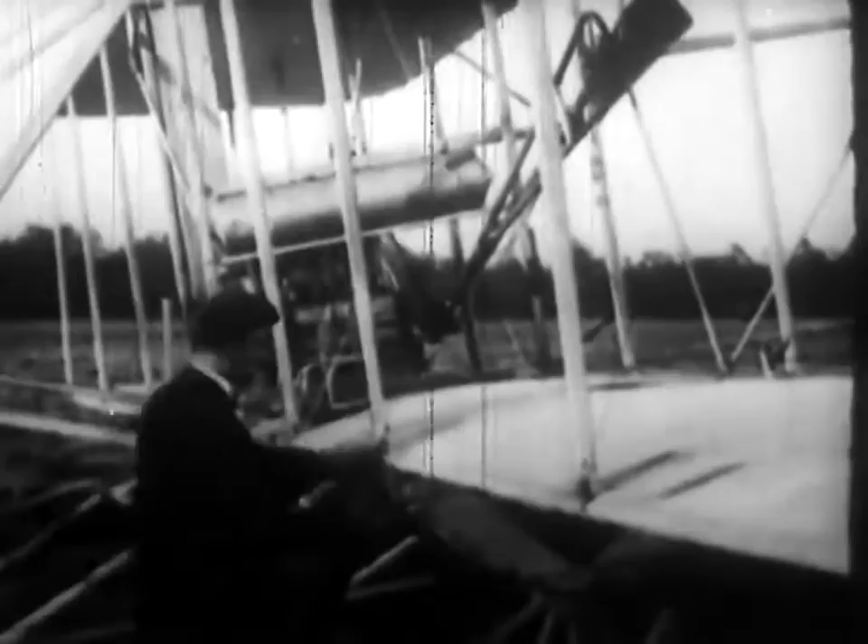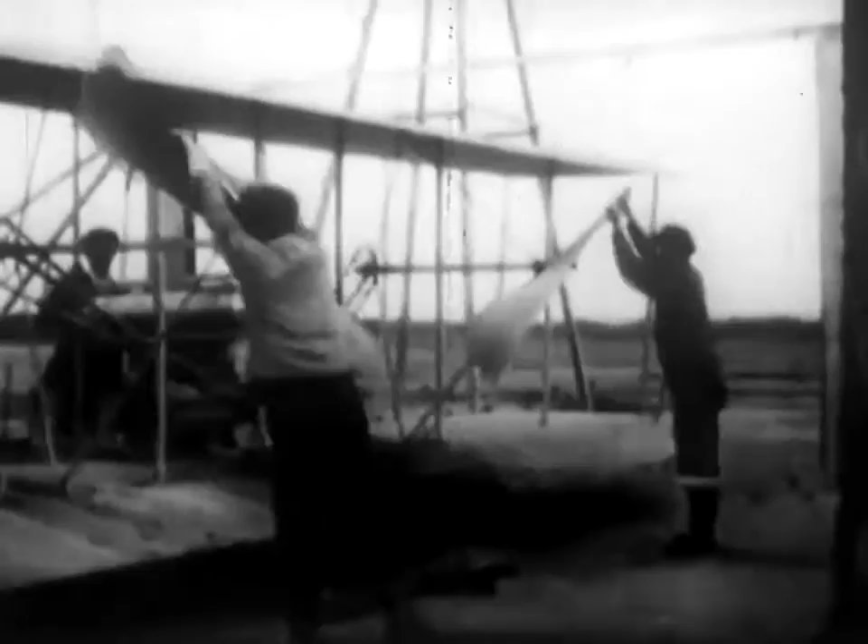In 1903, on the plains of Kitty Hawk, North Carolina, this history began. In the granddaddy of all modern planes, the Wright brothers won immortality by sustaining flight in a heavier-than-air flying machine. There is no fuss or ceremony, no cheering crowds. The motors sputter and catch, weights drop, the ship catapults off the ground into the air for the first flight on record.

Since then, aviation history is written in a never-fading book of records. In 1928, a Lockheed Vega, the well-known Yankee Doodle, reaches New York from Los Angeles in 18 hours and 58 minutes. At the controls are Colonel Arthur Goebel and Harry Tucker.

In 1929, Captain Frank Hawks climbs aboard his Lockheed to set a new transcontinental mark. Good luck, Captain. New York is only 3,000 miles away. Off on his way to a new record, one of the many he is to establish in the years that follow.

Into the cockpit of his Lockheed Sirius climbs Colonel Charles Lindbergh. Mrs. Lindbergh is with him. Flying together, as always, they are heading from Washington, D.C., across the Bering Sea to Japan. A perfect landing after almost half the world has rolled by beneath their wings. Cheers and waving flags as Tokyo greets them.

That same year, 1931, Ruth Nichols lands her Lockheed Vega after establishing a new feminine altitude record of 28,743 feet. Nice going, Miss Nichols.

1933, a famous Lockheed, the Winnie Mae, carrying a famous flyer, comes home from a solo flight around the world. What an achievement for Wiley Post. First man to fly around the world alone, and first to fly around the world twice, both times in a Lockheed.

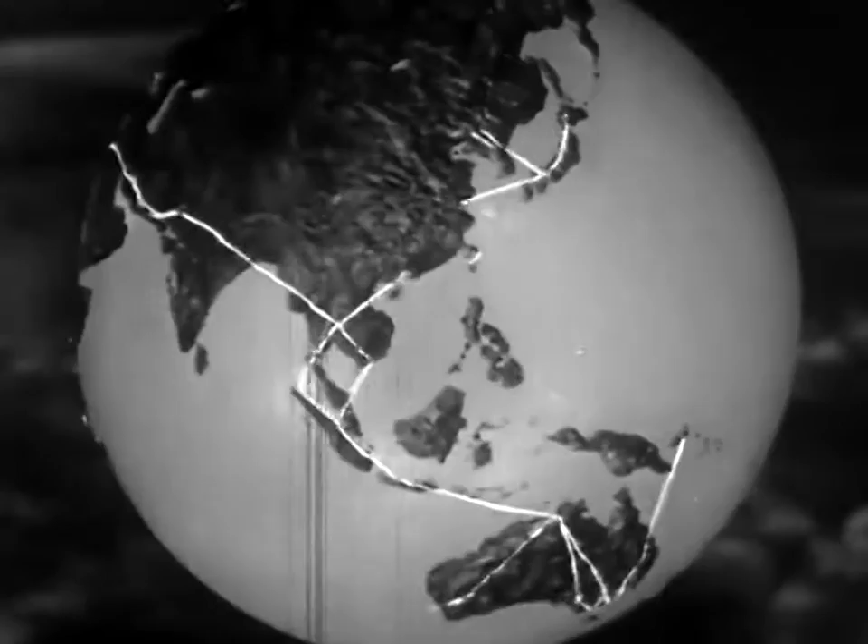Worldwide coverage, but it has not been accomplished in a day. It is the result of a smooth-running combination of men and machines. In that combination lies the story of Lockheed itself. It is a success story, modern, exciting, typically American.

The Lockheed Aircraft Corporation plant, Burbank, California, in 1926. And today, the same company, the same location, but quite definitely not the same plant. As recently as 1932, sales aggregated the overwhelming total of $23,298.03. In 1940, actual deliveries amounted to more than $42 million, and conservative estimates indicate that in 1941 this figure will be more than doubled.

And to the men of Lockheed belongs a large share of the credit, to their skill and to their loyalty. They are a cross-section of typical American workmen: drillers, riveters, toolmakers, die-casters, machinists, and technicians. In 1931, there were only 300 of them. In 1941, over 35,000. Every man who checks in, from office boy on up, has taken and passed exhaustive tests covering intelligence, temperament, and special aptitude to prove his individual ability. 35,000 American workmen, the right men for the right jobs to build the best planes.

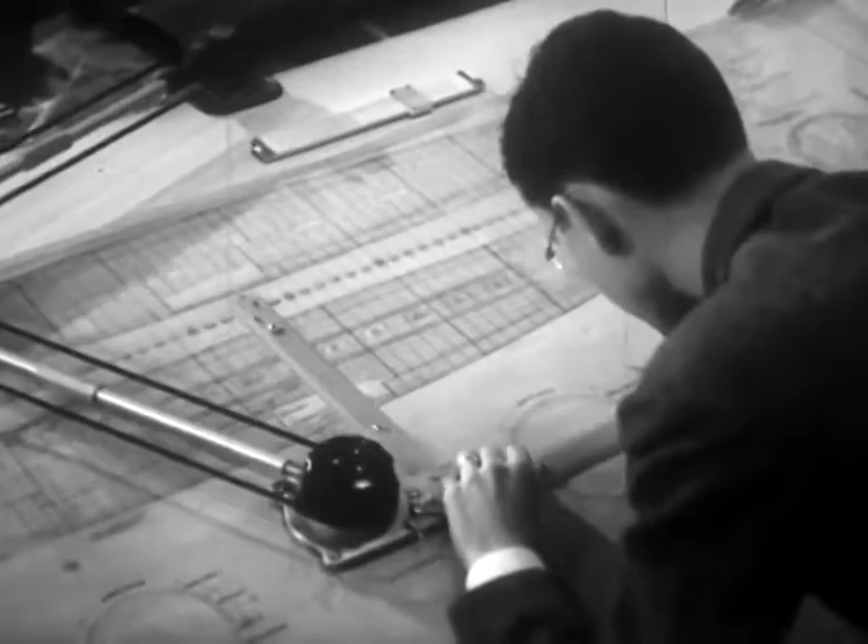This is not a trick shot made with mirrors. It is the drafting room of the engineering department, where every new Lockheed has its beginning, conceived with the purpose of supplying the answer to definite needs of the aviation industry. To attain this goal, over 850 engineers make over 5,000 drawing plans, devoting a total of over 200,000 work hours to their mission of creating one new design. The component parts of a modern airplane's wing, fuselage, and tail surface are almost countless in number, yet every single one of them must be engineered. Even the most minute part receives the greatest attention. Four separate drawings are made showing detail from four different angles. Although the part is no larger than a silver dollar, it will have to go a great deal further.

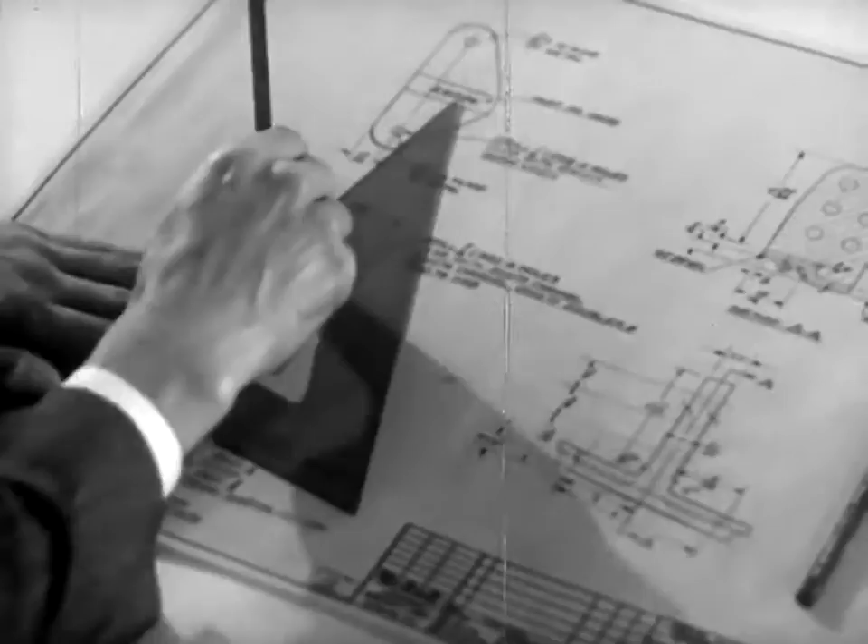The interior of a plane is one feature of design seldom associated in one's mind as coming under the supervision of the engineer. Yet one of his most important jobs is to provide utter comfort for passengers traveling through the air at high speeds. The Lodestar's cabin has been designed for this comfort. Inside, the sound of powerful motors is reduced to a pleasant hum by scientific soundproofing and vibration control. Restful chairs, ample space, and headroom are results of thoughtful planning, and all Lockheeds are especially adaptable to the requirements of private owners. For businessmen to whom time means money, the Lodestar is convertible into a convenient and dependable office in the sky. The compact 12 becomes a comfortable lounge for attending important events anywhere at any time.

The cabin of Lockheed's new four-motor transport, the Excalibur, will look very much like this. Although the plane is still under construction, the engineers have built an exact replica, known as a mock-up, out of wood. In this way, every possible detail of passenger comfort can be effectively predetermined and applied.

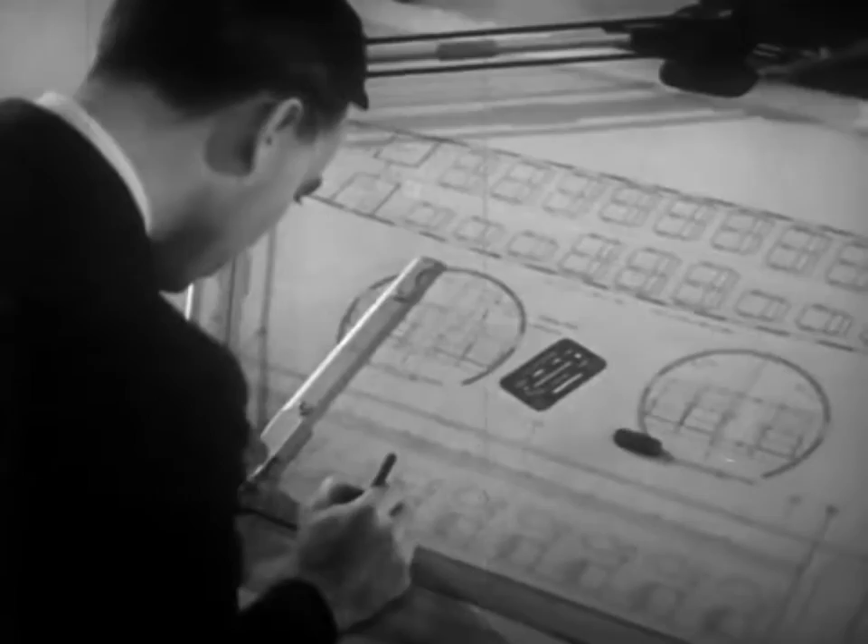But the ideas and plans that this man and the hundreds like him put into execution are not only those of Lockheed's chief engineers, but those of the entire flying world. For the Market Research Division maintains close contact with the operative branch of the industry. The staff compiles lists of important features relating to a plane's design. These findings are set up in the form of questionnaires.

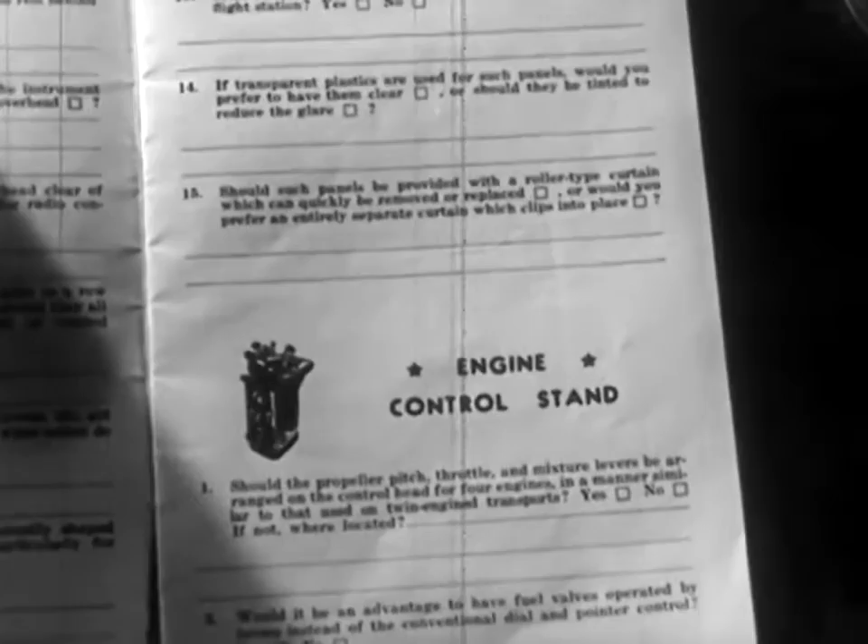If you were to build your own ship, on the flight station, where would you locate emergency controls? On the engine control stand, where would you put the levers? And the rudder pedals? These comprehensive questionnaires are sent to airline executives, pilots, transport officials in every corner of the world: to Trans-Canada Airlines, R.C. McLeod in South Africa, Tri-American Aviation, Buenos Aires. The list is almost endless, but to mention a few more: American Airlines, Lieutenant Thatch of the VP-5 Squadron Canal Zone, and British Airways.

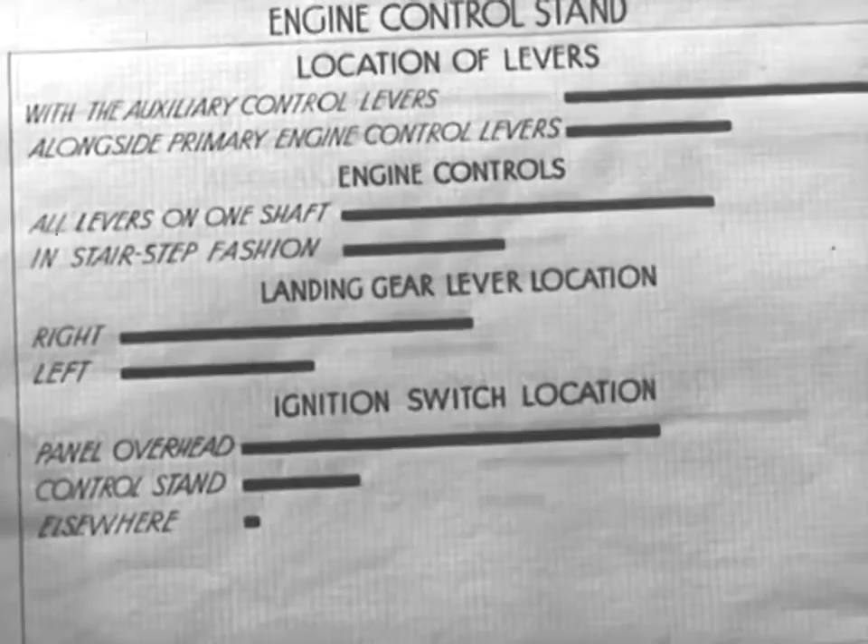The replies to these pamphlets are carefully sorted, for they represent knowledge gained under actual flight conditions. Detailed graphs and charts are compiled by competent statisticians. No suggestion is too small. Every answer to every question is checked and noted. These findings are recorded in another pamphlet: You told us this is the way you would do it, on flight station, on engine control stand, and on rudder pedals. We asked, are brake toe pedals desirable? 93% said yes, 7% no. That verdict is submitted by men whose combined opinions represent the experience of over 16 million hours of flying.

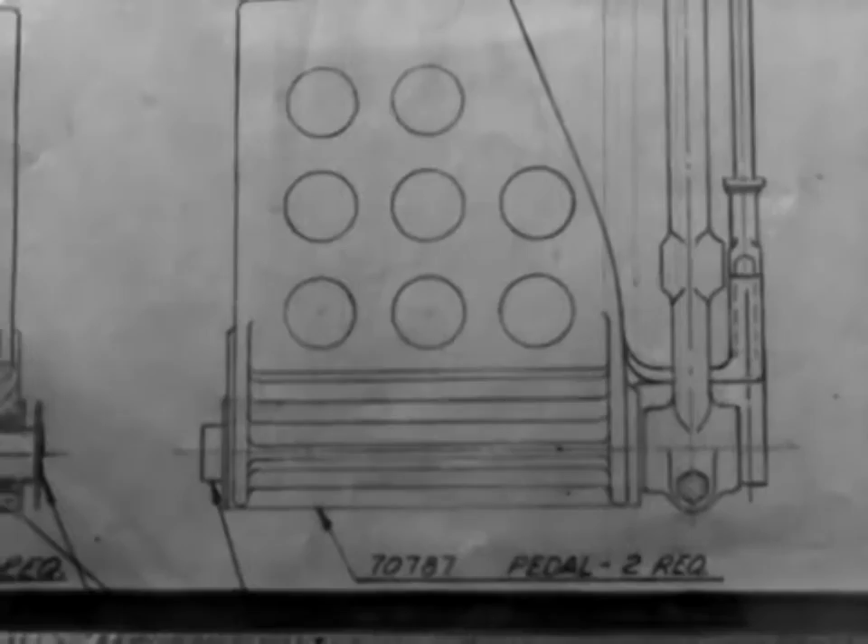These practical viewpoints, as gathered by market research, are submitted to the engineers. They combine these ideas, together with their own creative ability, in the conception and building of every new Lockheed plane. That's how Lockheed designs airplanes to suit the men who know airplanes best: operators, pilots, and regular airline passengers.

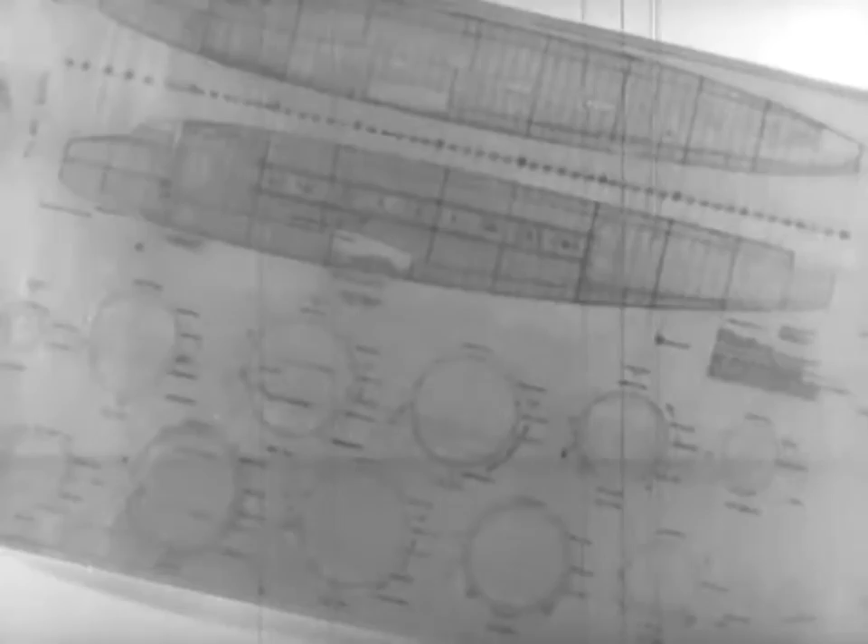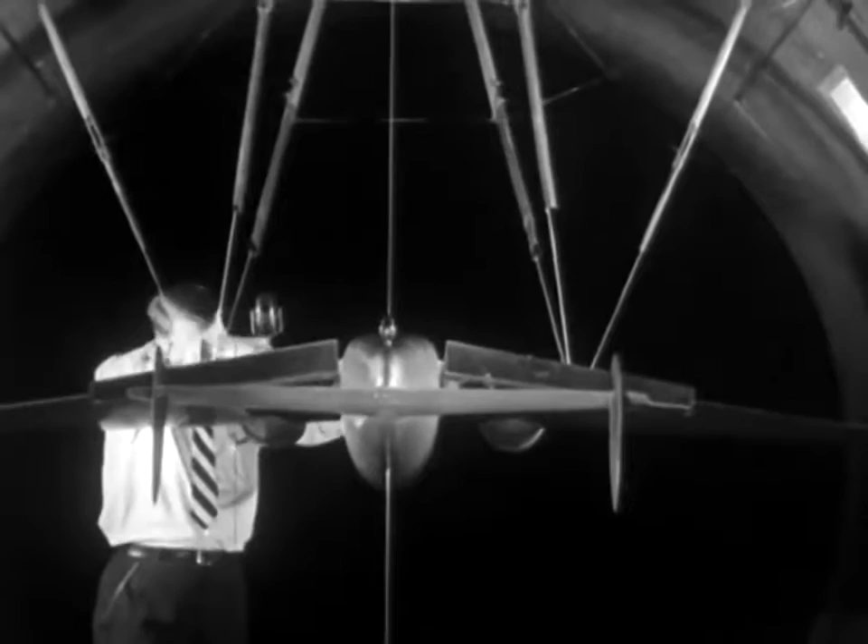And the first form a new plane takes is on paper. From these drawings and thousands like them, an exact scale model known as a wind tunnel model is made and is connected to instruments which determine its flight characteristics. The model is hand-carved, accurate to the fraction of an inch, weighs over 500 pounds, and costs more than $5,000 to build.

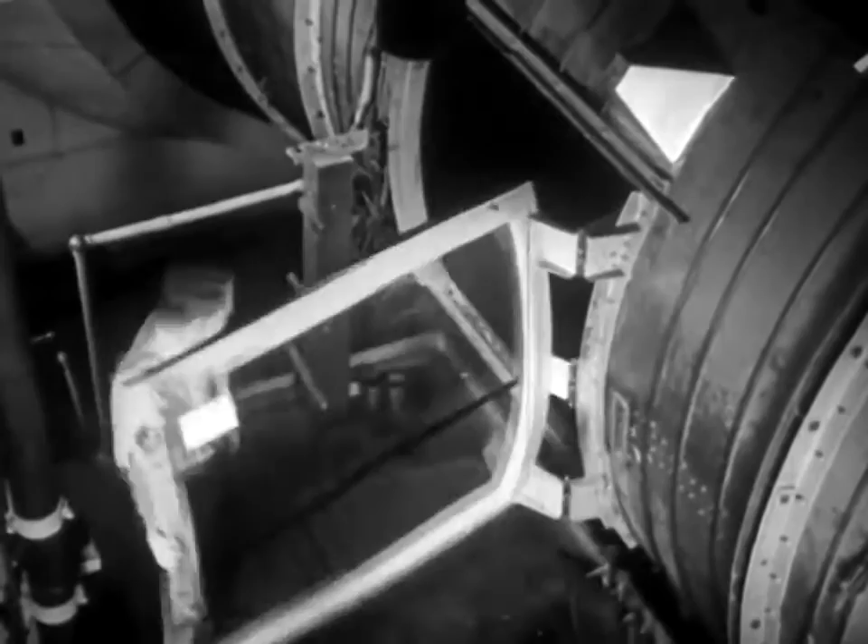The door is closed, the wind tunnel sealed. A flip of the switch, and the wind propeller whips up to speed. The model is exposed to a far higher velocity than this 90-mile-an-hour wind.

The small wind tunnel model is actually subjected to and withstands a much greater force. From an idea to an actuality, from theory to fact, from a model to a completed Lockheed, the plane has been built. More than that, into it has been built the strength, ruggedness, and durability necessary for its safety and high-speed performance.

But not so long ago, this shining plane was only a small part of a trainload of metal addressed to Lockheed, for the metal inside these wooden frames is the stuff that planes are made of. Hard and strong, it must be fabricated by men and machines into the parts that make airliners.

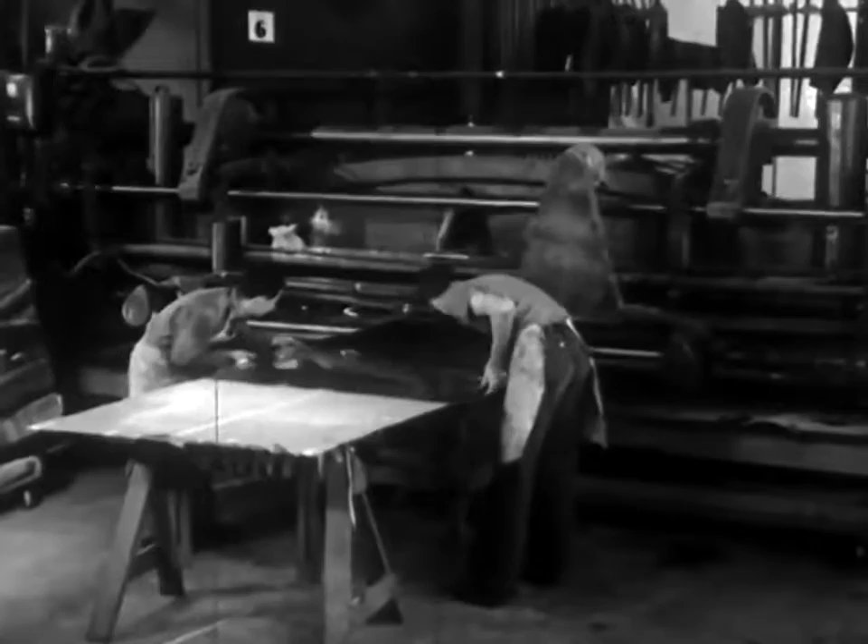Giant shears act as huge mechanical scissors. Metal sheets are slipped into place. The sharp blade strikes and cuts through them as if they were cloth.

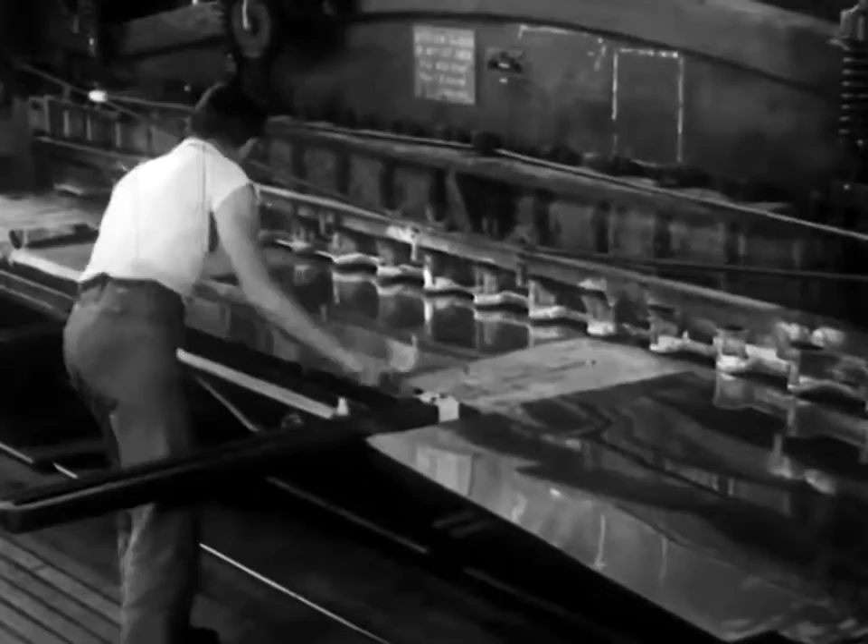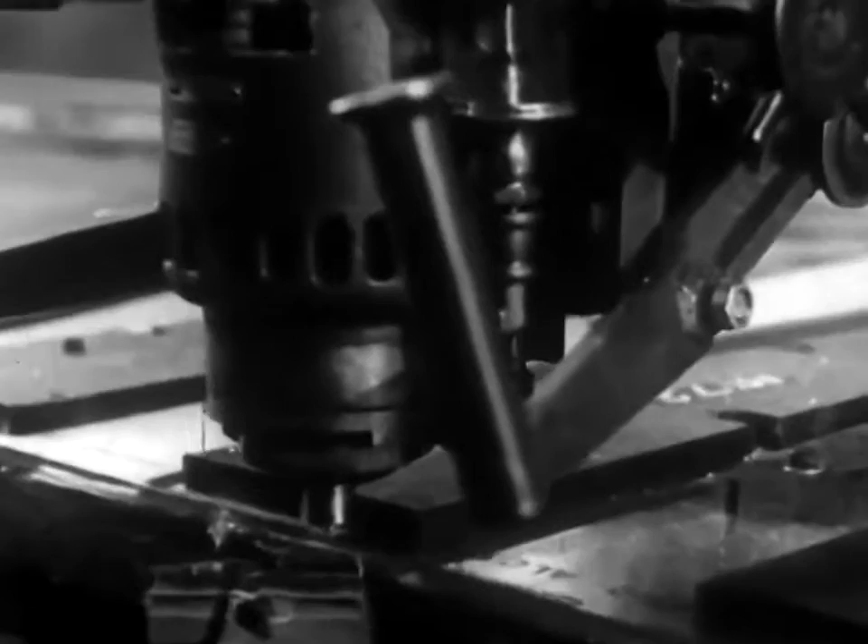The high-frequency router, a dental patient's nightmare, turns 15,000 revolutions a minute and cuts layers of metal into their first rough shape. The bit turns so fast that it must be cooled by a constant stream of oil.

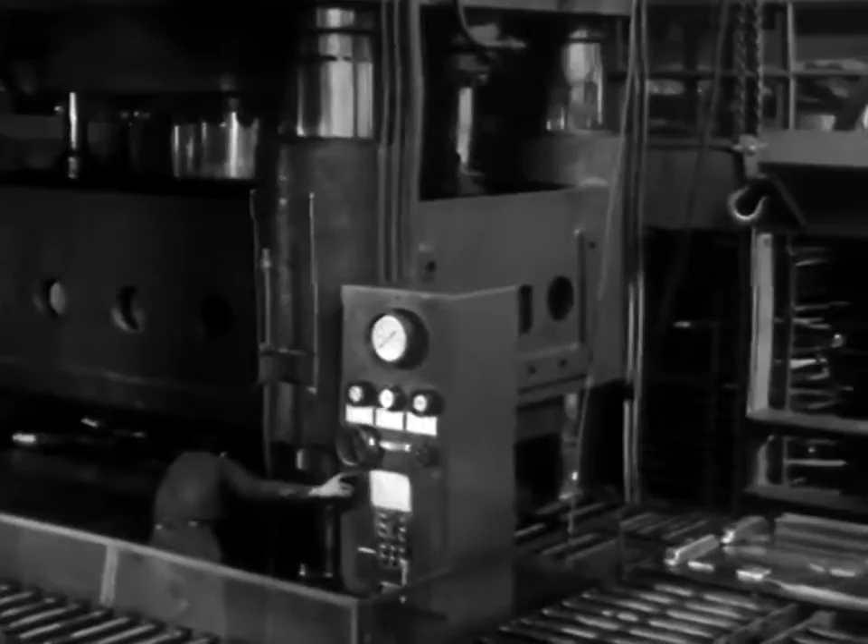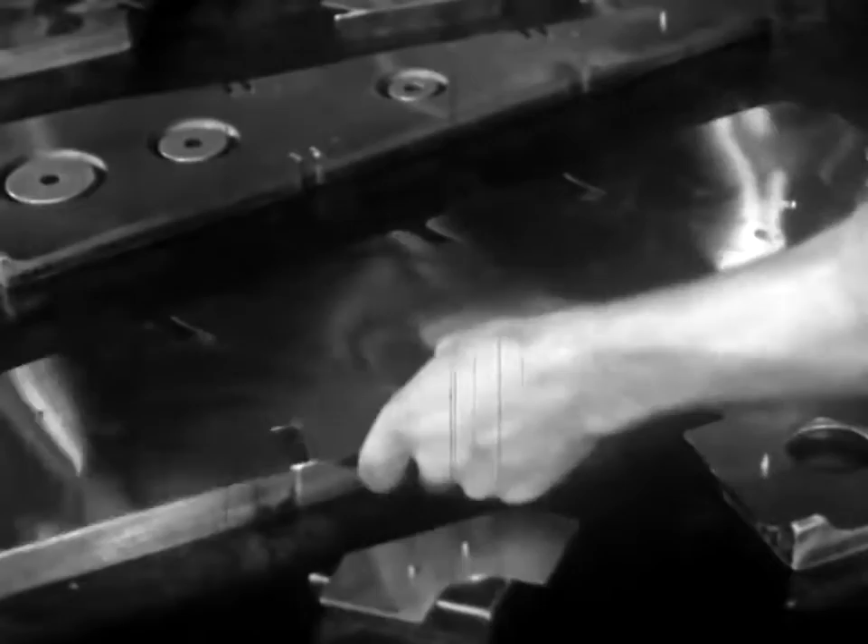The massive hydro press exerts an overall pressure of 9 million pounds, and it literally squeezes parts out of metal. An endless chain of roller conveyors carries a tray with the forms to workmen. They put the metal, which has already been cut to the correct size, in place on the forms. The tray now continues on its way into position under the press.

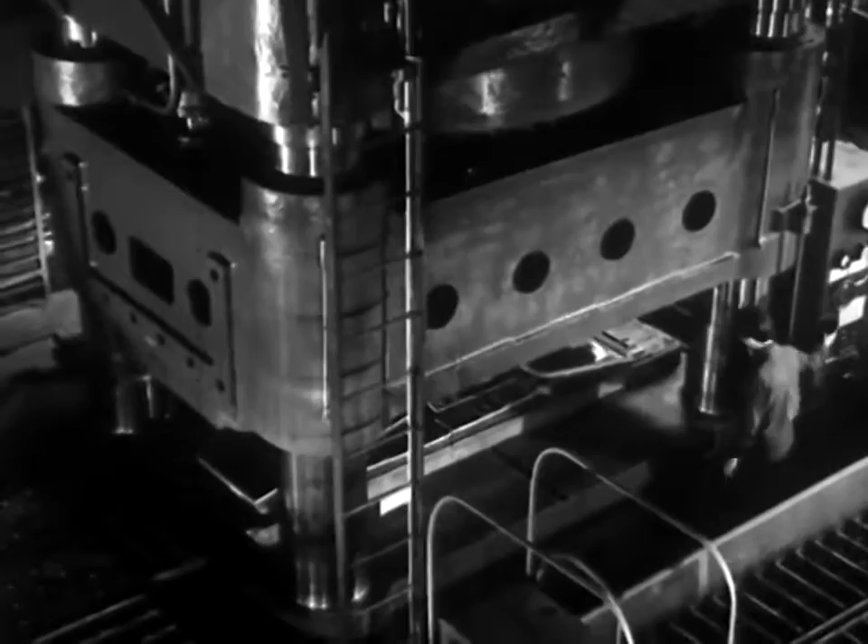The operator touches a switch, the press starts down, and look out below. Almost unbelievable pressure, an irresistible force, but under perfect control. And where plain sheet metal went in, finished parts come out. The hydro press turns out more parts in 1 minute than 2 men could complete in a whole day, and turns them out better and more accurately.

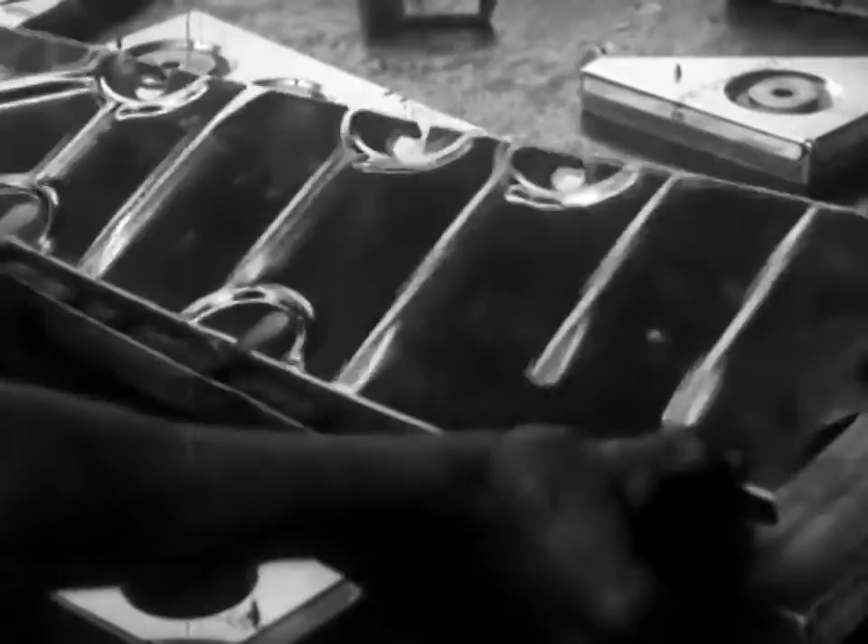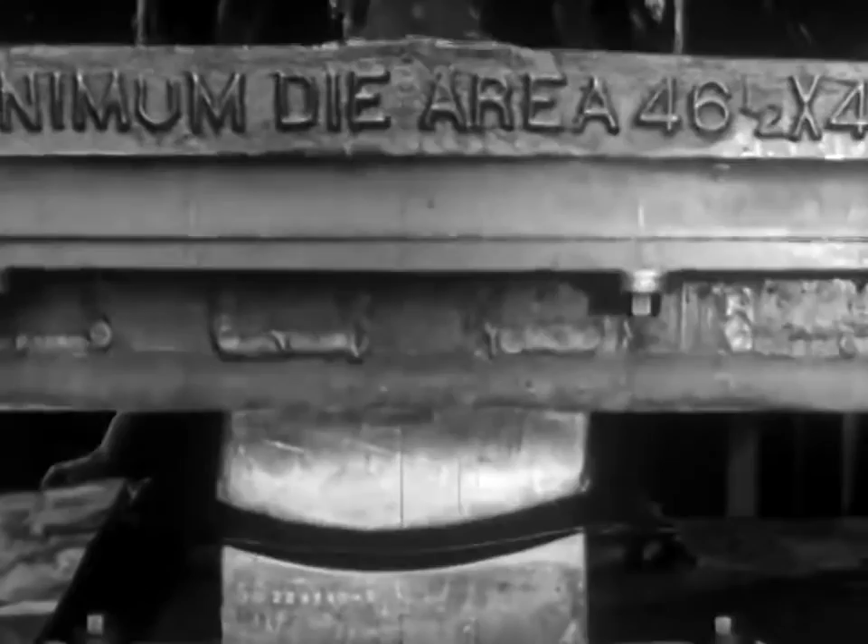A compressed air stamp which forges metal is an excellent example of powerful machinery under absolute control. Taps as gentle as a tack hammer, then the crushing impact. What a nutcracker this outfit would make. And yet its control is so delicate that it can crack an egg, at least so the operator claims. Look out there, a little too hard and you'll have an awful mess. Be careful.

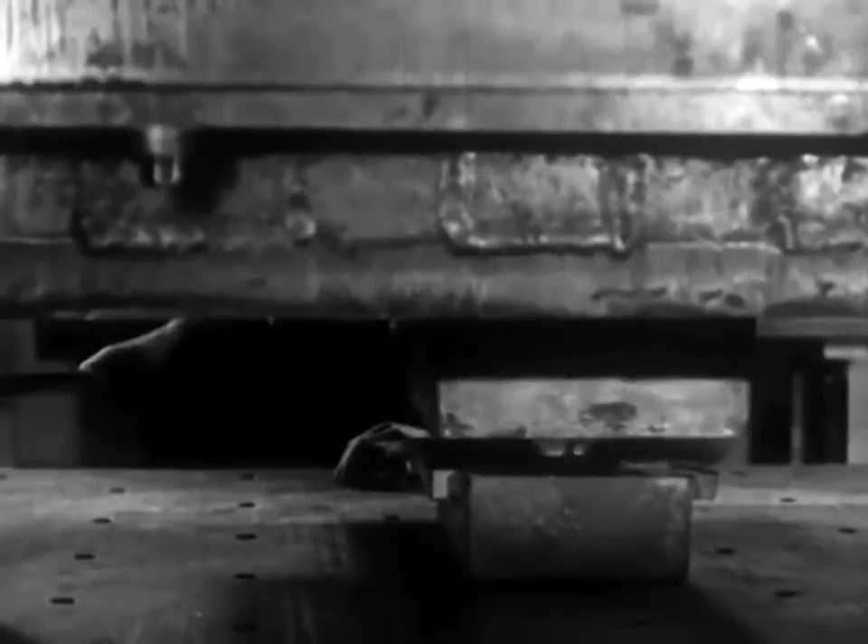Skilled men and precision machines have fabricated these parts. But even metal can be strengthened and protected. To do this, there are several types of processing. Complete electrochemical anodizing baths provide parts with a protective coating of oxide film. This is a safeguard against the threat of corrosion caused by moisture.

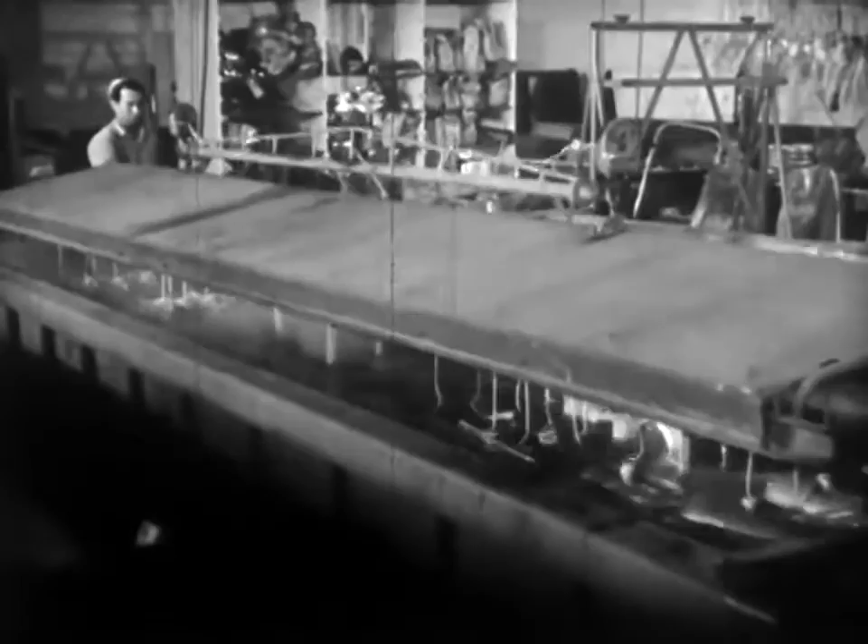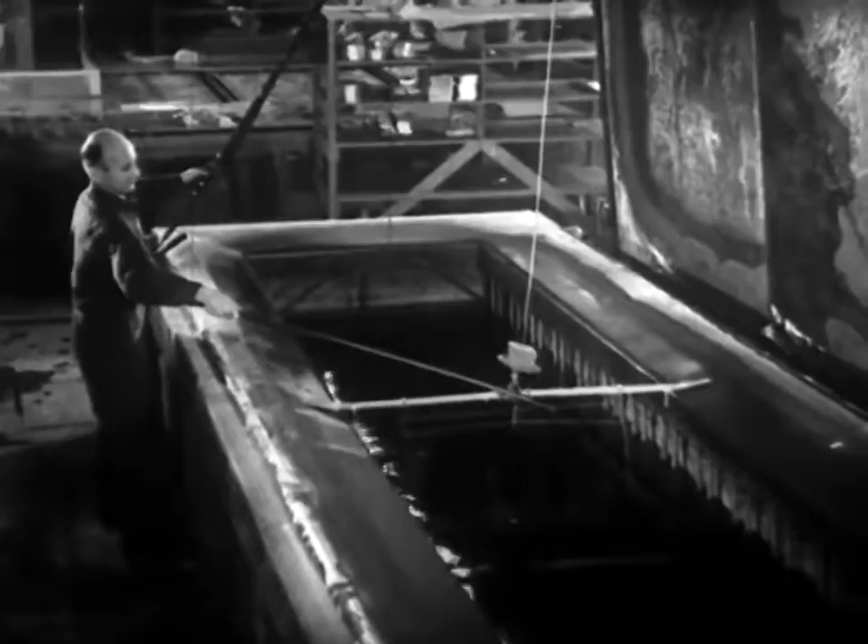It is an interesting fact that these parts are protected against any harmful effects of moisture by being given a bath. Another type of bath is used for a different purpose. In order to harden and thereby strengthen certain parts, they are immersed in a hot salt solution of sodium potassium nitrate. In large ovens, other parts are hardened by baking at 1550 degrees Fahrenheit and quenching them in oil.

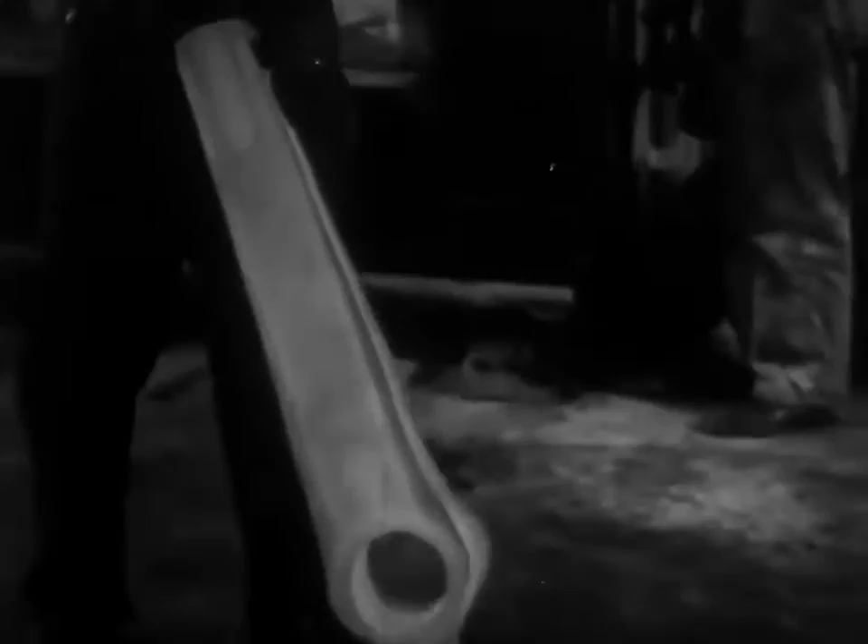It is easy enough to say that these parts, which will eventually be the plane, are strong. To prove that they are, to constantly guard the Lockheed measure of strength is the duty of the testing laboratory.

A spectrograph is one of the most modern scientific testing devices. It analyzes the purity of the metal alloys which go into a plane.

Tremendous heat created by an arc burns sample filings of the metal. These filings are placed in a cavity on the lower of 2 acid-treated graphite electrodes and then burned. The light of the burning metal passes through a lens and then through a rotating sector, the adjustable opening of which controls the amount of light falling on the slit.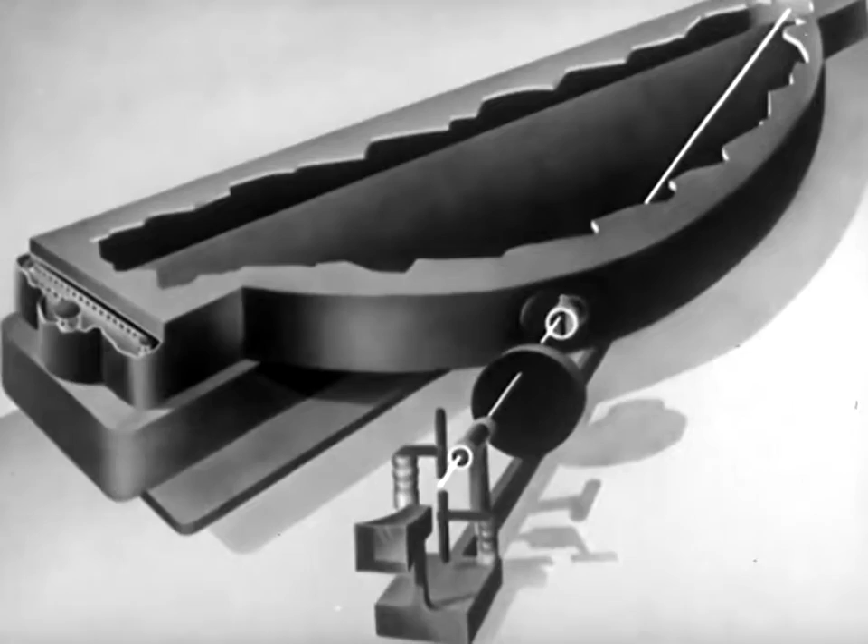The light now passes through the slit and falls upon a diffraction grating. This diffraction grating is a concave aluminized glass plate on which 24,000 lines per inch have been ruled with a diamond point. The light is separated by the grating into wavelengths.

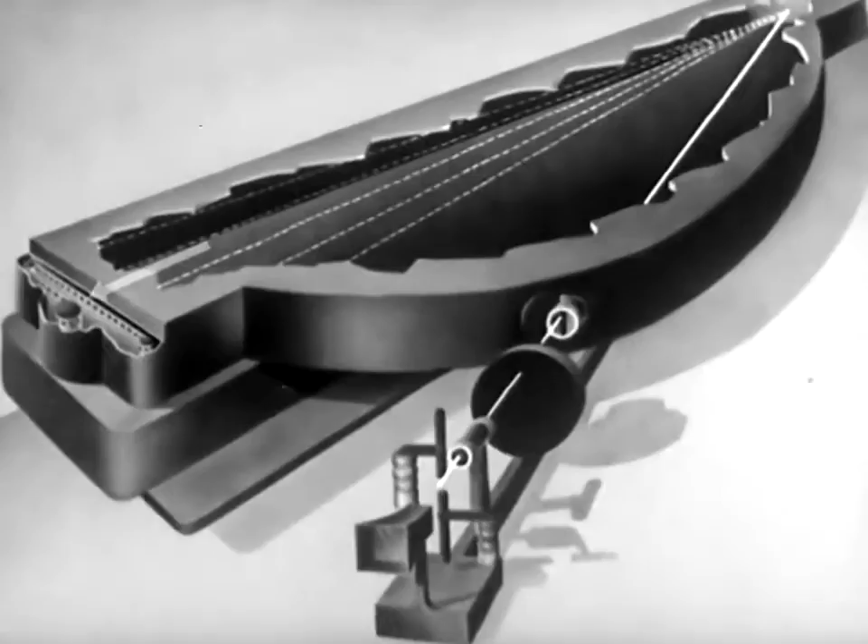These wavelengths, or light rays, fall upon a strip of film, and a photographic record of them is thus produced. Since each element has its own wavelength, from the developed film it is possible to determine exactly which elements are present in the alloy. In this manner, the spectrograph immediately detects all impurities, and any inferior metal is promptly discarded.

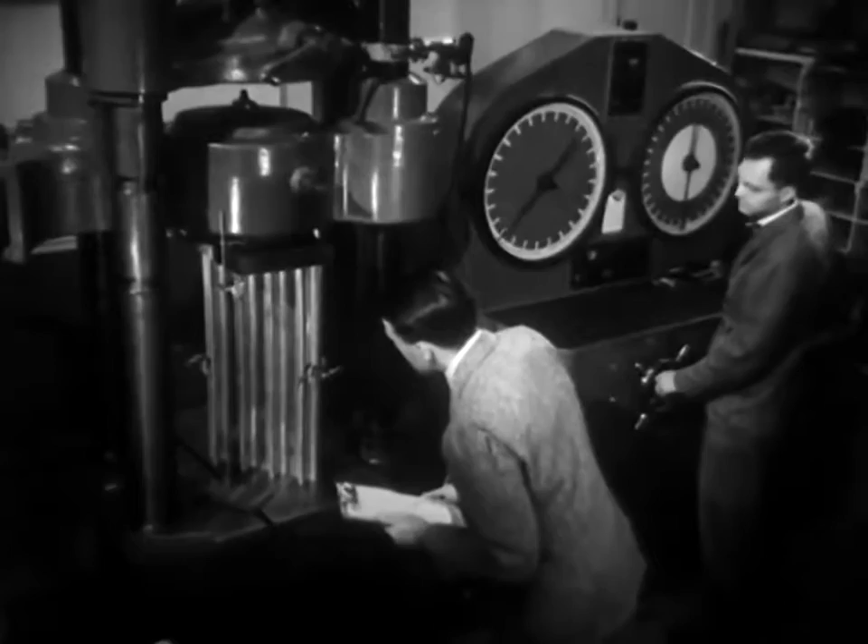The sole purpose of this huge machine is to break things. Its powerful jaws, capable of a compression of 300,000 pounds, are about to crush a small section of the wing in order to measure its resistance.

Now watch carefully. The upper jaw is clamping down with an invisible, relentless force on the seemingly frail strip of metal. But actually, just how frail is it? 60,000 pounds? 70,000? There it is, a slight ripple. The breaking point has been reached, and it takes a pressure of over 80,000 pounds to even bend this frail little section of a wing.

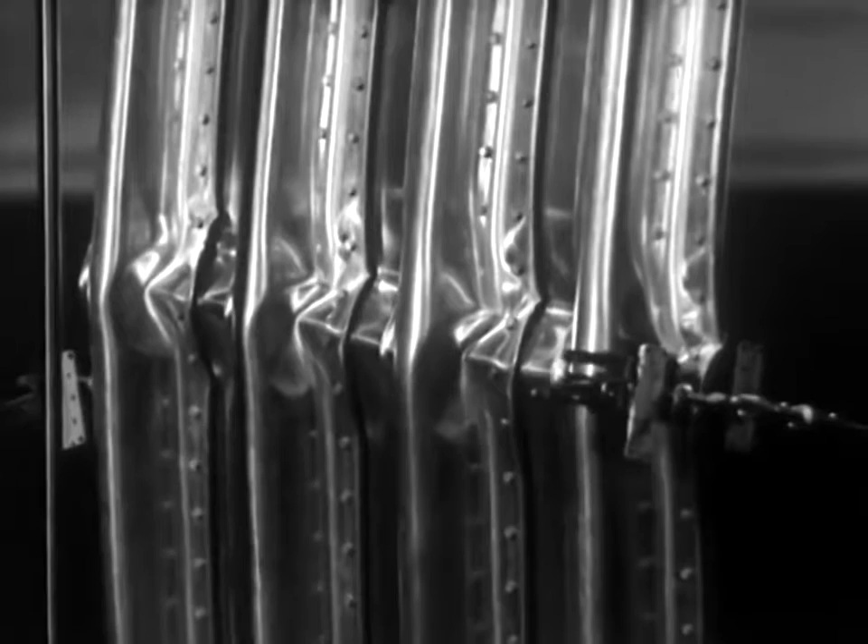For contrast, let's see what happens to a solid cylinder of concrete, which certainly appears much stronger. There is the first crack, and the concrete shatters completely under a pressure of less than 75,000 pounds.

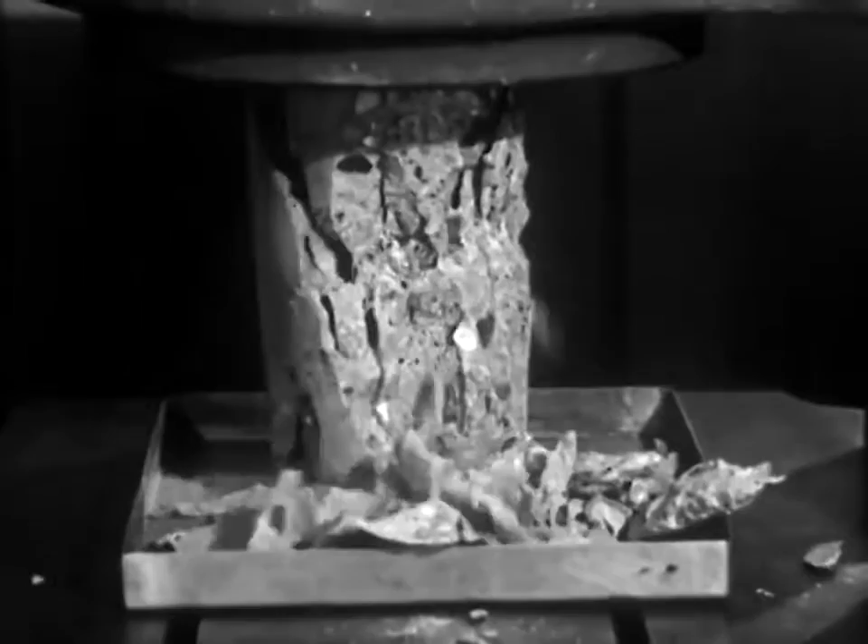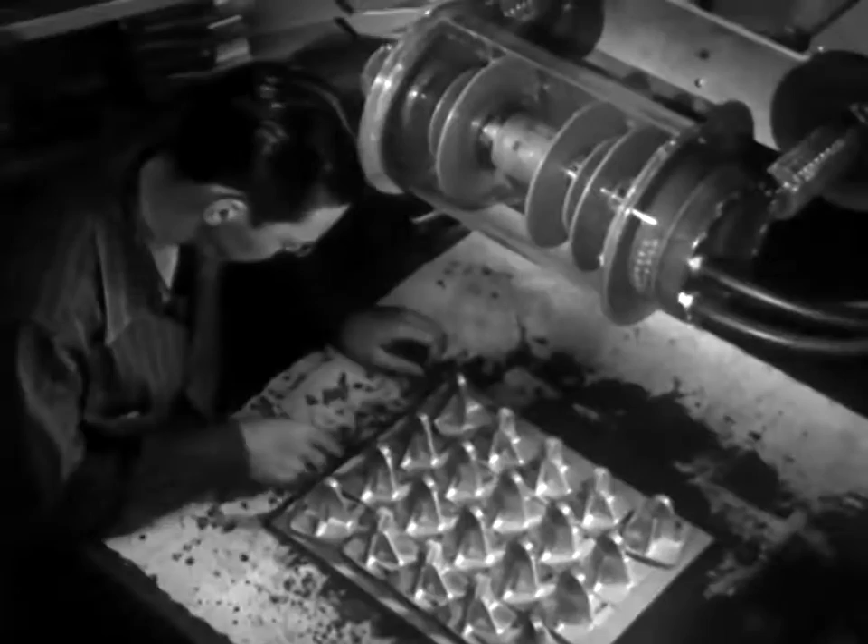All stressed parts, such as forgings and castings, are X-rayed for any possible flaws in the metal. Lockheed X-rays more parts than all other aircraft manufacturers combined. They may look new and shiny on the surface, but that doesn't matter. What are they like underneath? This batch is fine, perfect.

A different story here. Those slight, almost imperceptible flaws which doom it to the scrap heap would be invisible to any eye other than the X-ray. Therefore, although it is important to know what is on the outside of a plane, every stressed part is X-rayed because Lockheed thinks it is even more important to be absolutely positive of what is on the inside. Yes, every part of this plane is built for the strength, ruggedness, and durability to achieve the highest speeds.

And there goes the Lodestar. Carrying a full load of 17,500 pounds, it speeds down the runway for the takeoff. In 15 seconds, after a run of only 860 feet, it leaves the ground and soars into the air. Climbing rate 1,200 feet per minute.

While the plane is in flight, the dials and indicators on the panel are the guides by which a pilot flies. Over a half a mile of wire connects them with the controlling instruments, which must be infinitely accurate before they are installed. In the instrument testing laboratory, each instrument and accessory is, to all intents and purposes, actually flown before being installed on the plane itself.

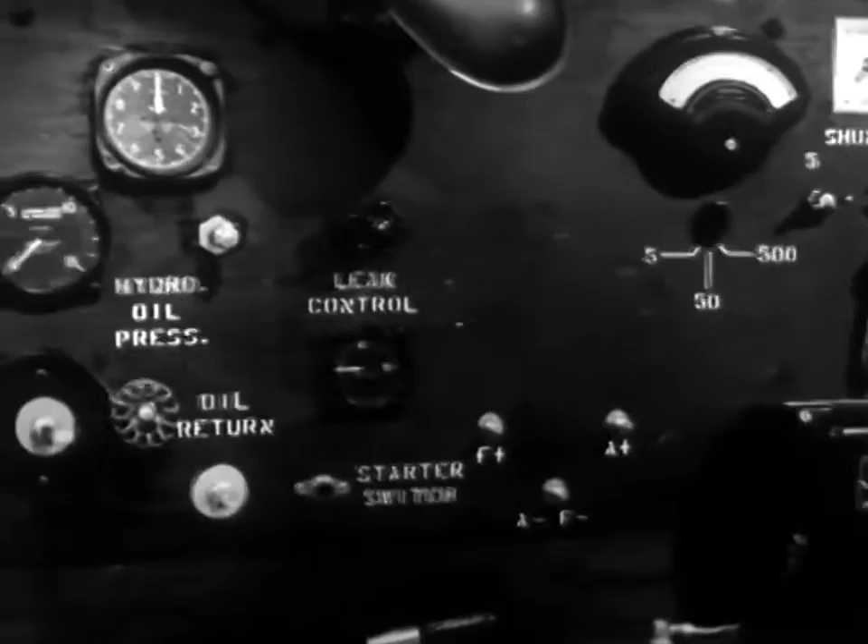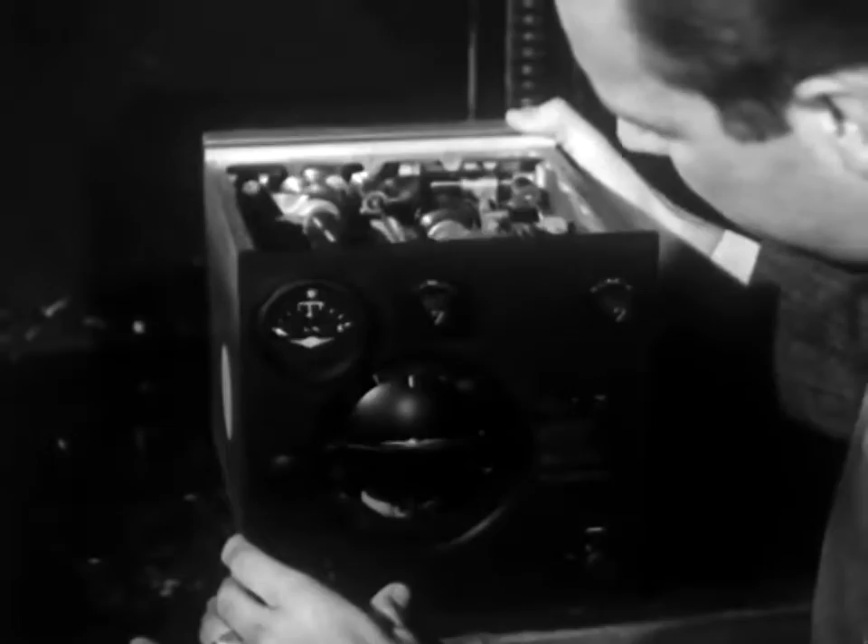For instance, on this stand, a motor duplicates the swing of a plane to test the turn and bank indicators. Here, tachometers are also tested, and propeller governors, vacuum pumps, fuel pumps, starters, generators, and hydromatic motors for feathering propellers. The automatic pilot is checked by a vacuum system against mercury manometers. This small box can guide a plane in flight, keep it as true to its course as the most experienced pilot.

An airplane is a chain of which the thousands of separate parts are the links. They must be forged together in order to shape the wing, the tail, and the fuselage. The duty of the wing is to provide the lift that sustains the flight of an airplane. Here in the plant, it must be assembled as flawlessly as it was designed.

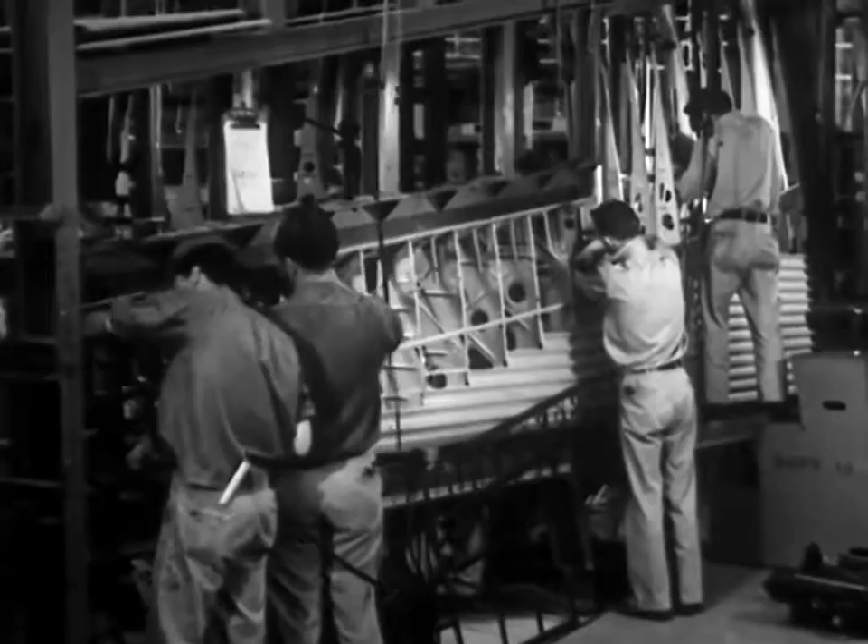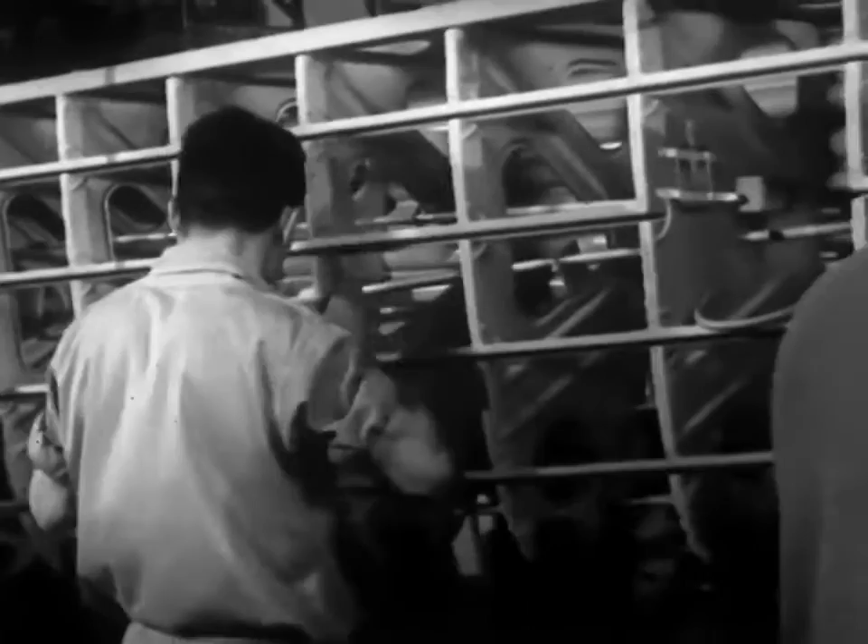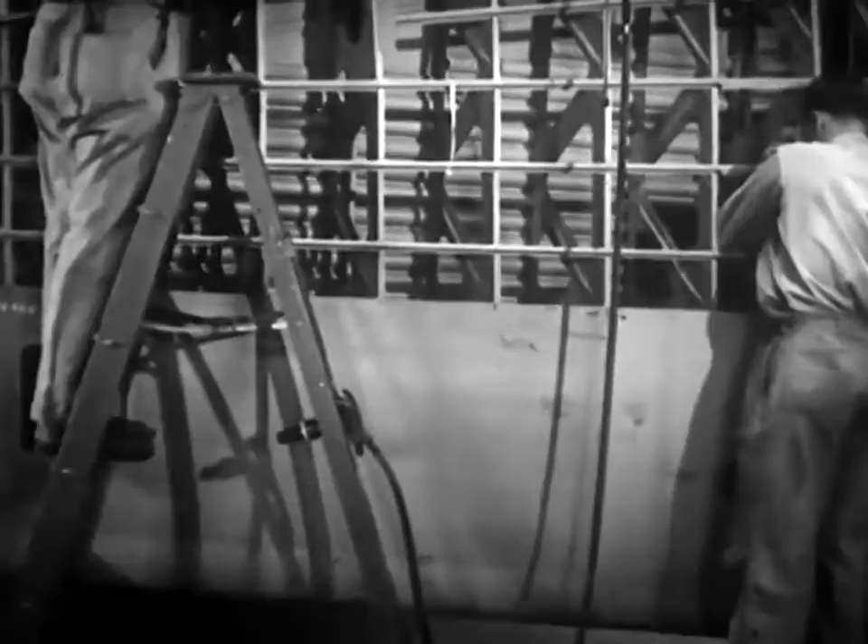Although a wing is generally considered as a unit, it is really composed of 3 parts, 2 outer sections and the center section. We are all familiar with the general shape of a wing, but while an outer section is in the first stages of assembly, we can get a good idea of the complex structure on the inside. Every rib and crosspiece has its purpose. Remember, it was just a small part of the wing that we saw withstand a compression of 80,000 pounds.

Each operation is executed with precision and care as the outer section moves down the production line and takes shape. High-speed electric drills punch holes for the rivets. There are more than 700 drillers or riveters who have all had previous training. Even so, before they're assigned to actual production, they must attend Lockheed's own school until they can uphold the plant's standard of efficiency and skill.

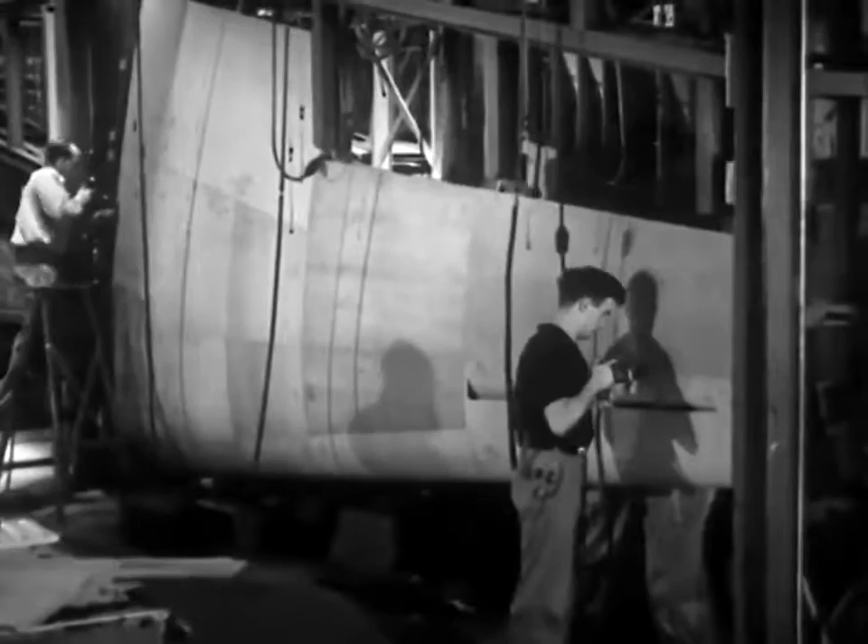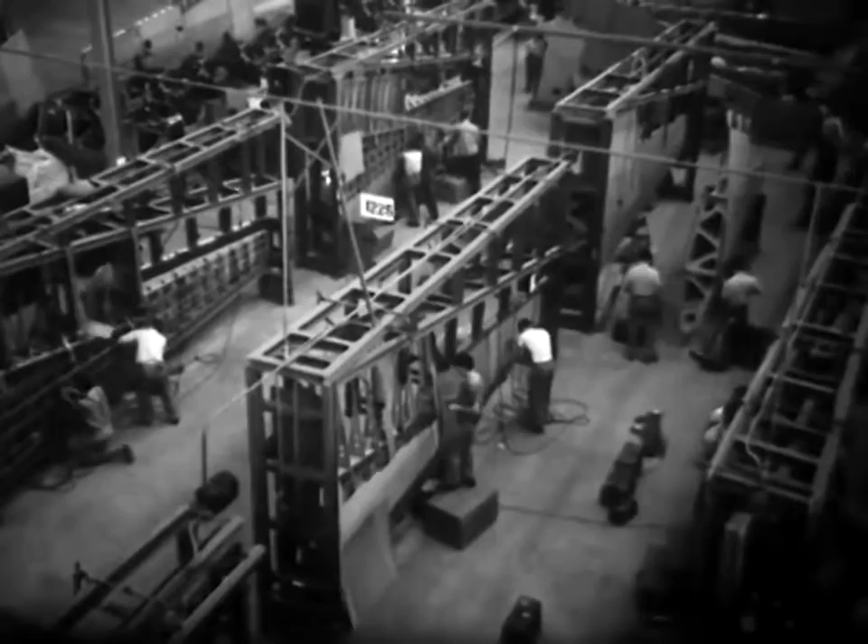There are more than 50,000 rivets on a completed wing, and every one of them is checked, examined, and checked again. This requires an army of over 200 inspectors, such as this one. But by the time a Lockheed plane is assembled, every square inch of it has been inspected at least 5 times. Inspector number 158 finds this row perfect and okays it. And the story of one outer wing section is the story of 10, of 20, of 1,000 sections as they move down the line in an endless parade. Mass production with the emphasis on precision and quality.

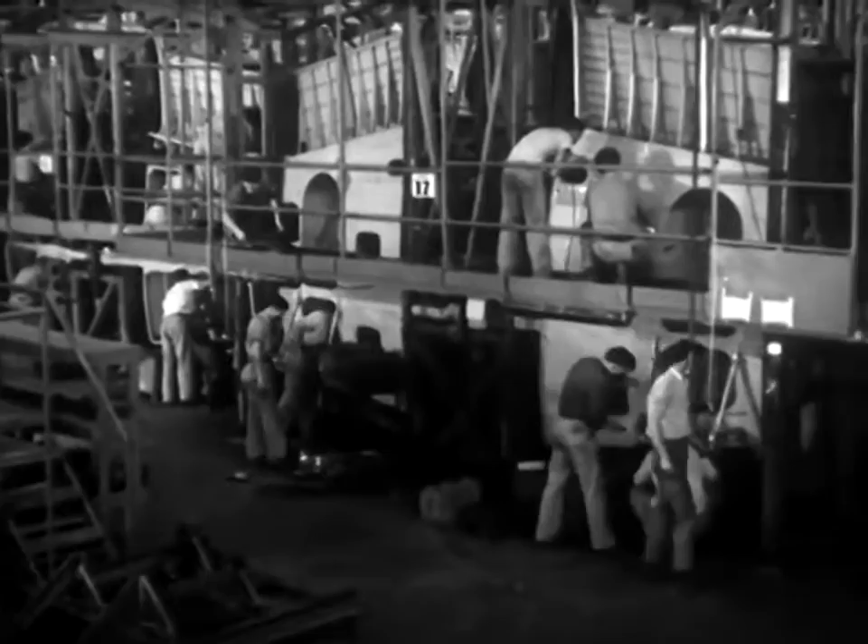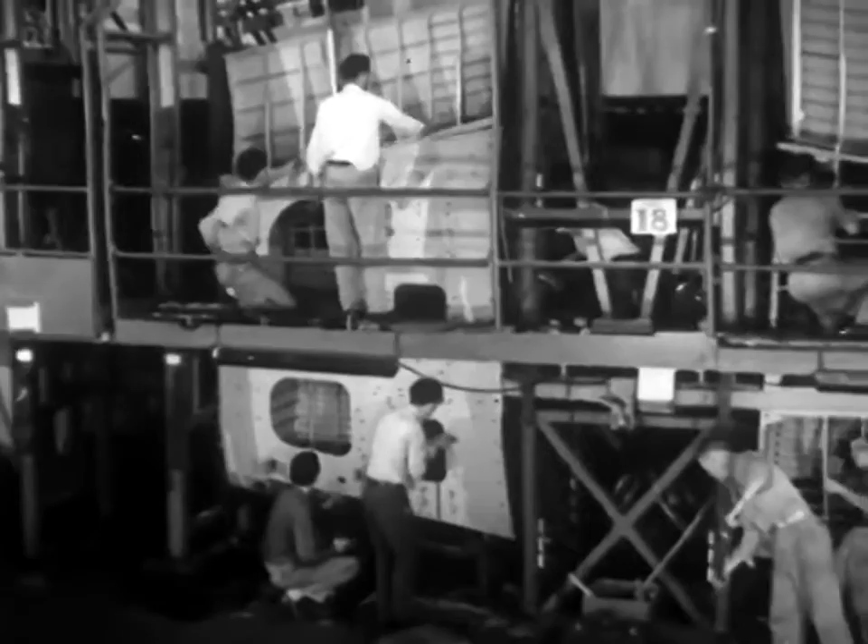The assembly line for the center section of the wing is one of the largest and most vital units in the plant. It has to be because the center section is the strong man of the plane. It must be constructed and assembled so as to be able to support heavy loads and to withstand great strain, for it unites the 2 outer wings with the fuselage.

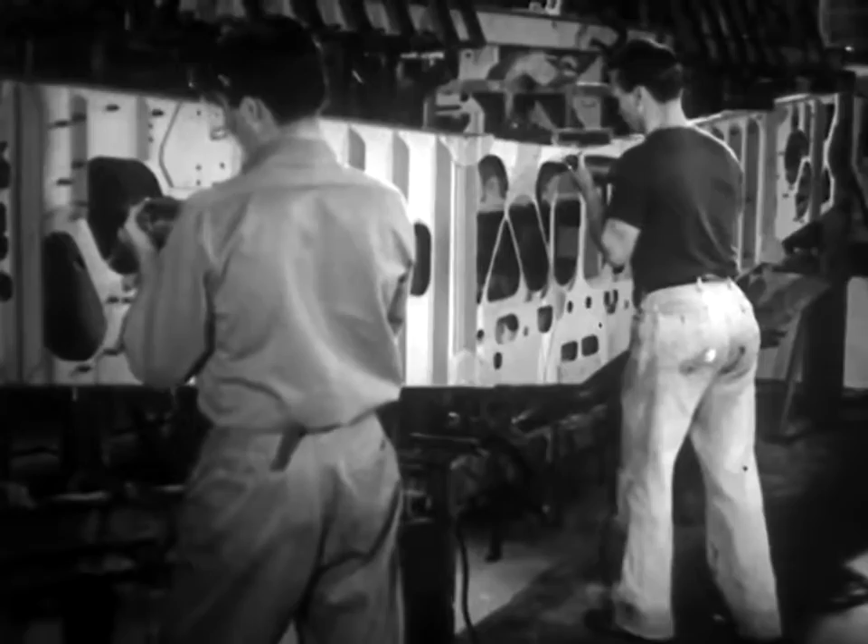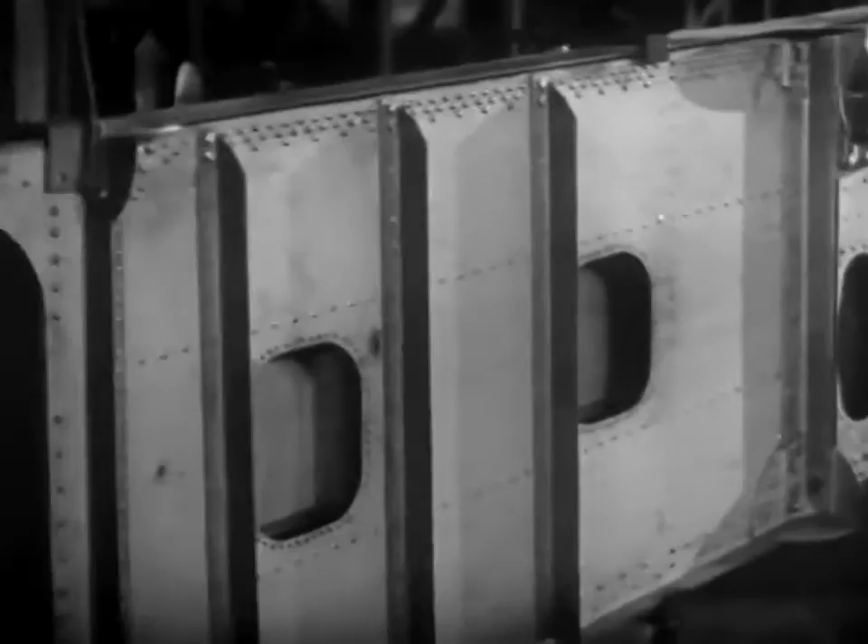The fuselage will eventually rest in the gap between the 2 shoulders, and the wings will be joined like arms on either side. The main beam of the center section is the strongest part, the backbone of the entire plane. Like a bridge, it must carry any burden with steadfast dependability. And the main beam is built just like a bridge. At all times, it carries all of the flying load, the engine load, and the landing load. And it is stressed to support more than 5 times the total weight of the fully loaded plane.

Completed and assembled, capable of supporting a static load of 70,000 pounds, the wing will do its job as the men who built it have done theirs.

The tail surfaces control the maneuverability of a plane. The use of twin rudders was developed by Lockheed and is one of the distinguishing features which point out every Lockheed. The fuselage is the body of the plane.

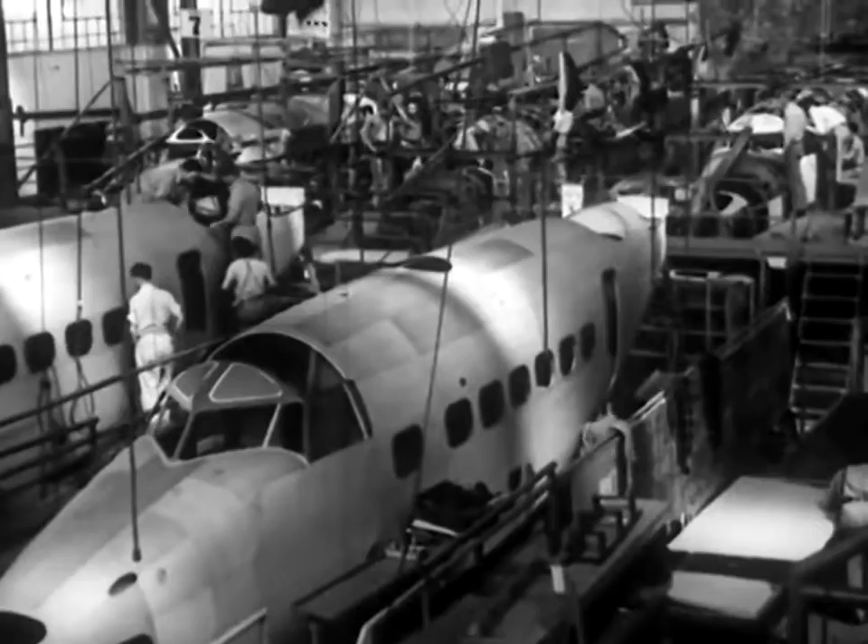It represents the final word in aerodynamic design and streamlining. During construction, these basic principles are built into the fuselage and applied to every operation from the beginning to the completed shell. As the first step in its assembly, the bulkheads are joined together by stringers, which form the basic shape and strength of the fuselage.

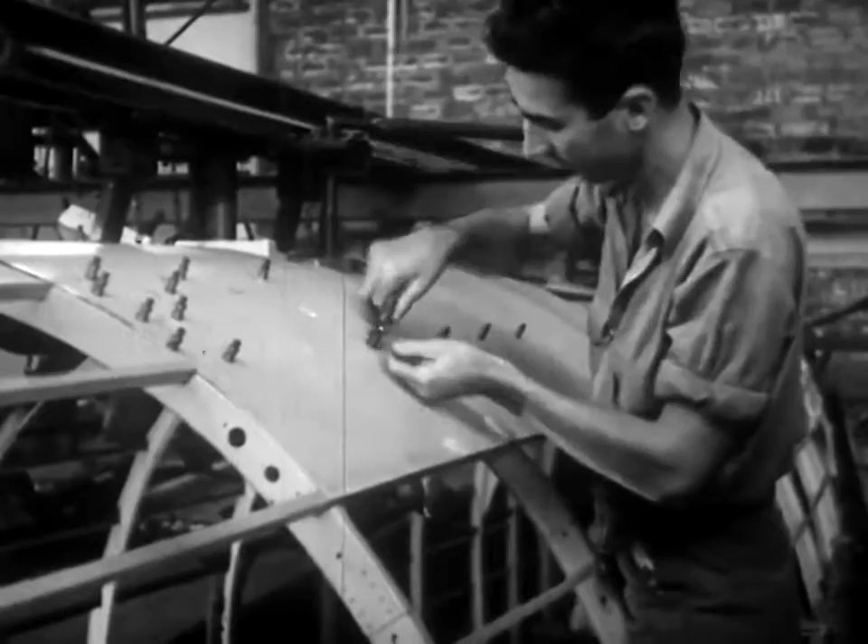Skin fitters then fit and shape the metal sheets, attaching them with removable fasteners. On their heels come the riveters, while every stage of the assembly is constantly under the close check of inspectors. Assembling with electric continuous spot welders facilitates production and gives many fuselage parts an extra smoothness for better streamlining.

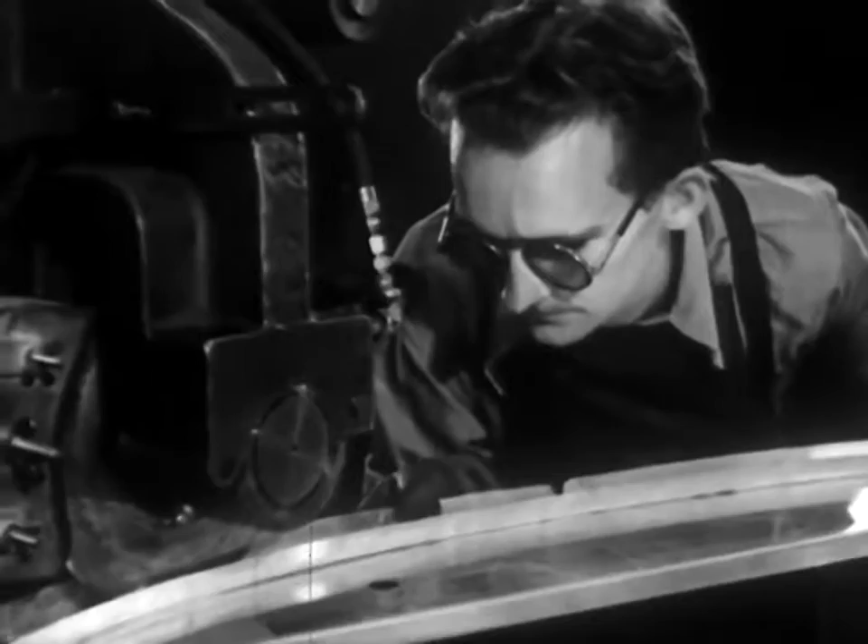With an eye to the future, Lockheed is constantly enlarging on this process because better streamlining means greater speed. And so another fuselage is finished and ready for mating with the wing. Like a ship being launched, it moves slowly down the ways. Slowly now, yes, but for just a little while longer.

Soon sunlight will be glinting from its metal sides. Its nose will point upwind. In the comfort of its cabin, passengers will read or write or sleep or think after their own fashion, and beneath it, the lakes, rivers, and valleys of the countryside will unfold.

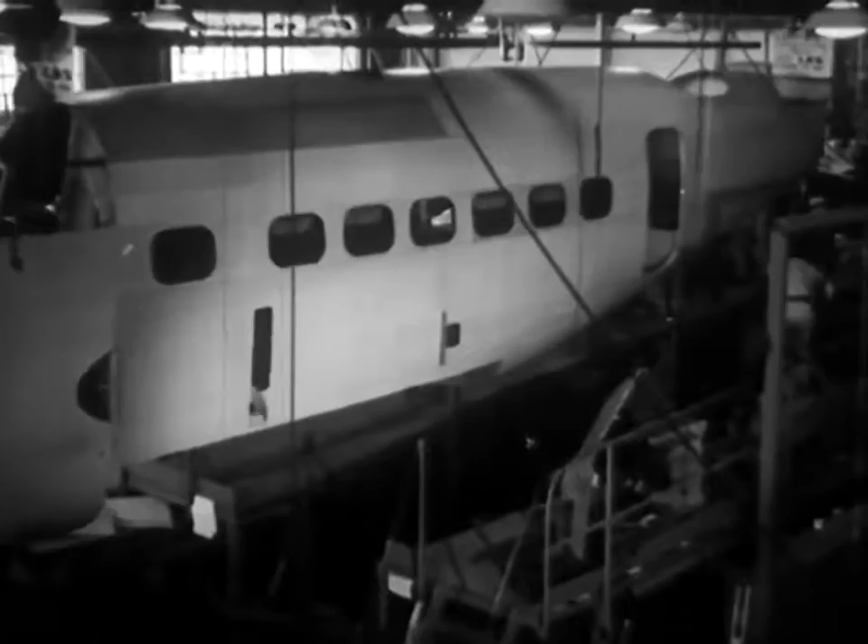Slowly still, the fuselage is lowered into place, united with the wing, and now, slow no longer. Speed on the water. Speed on the snow. Speed on wheels. On rails. Speed on wings. There is truth in the slogan that it takes a Lockheed to beat a Lockheed.

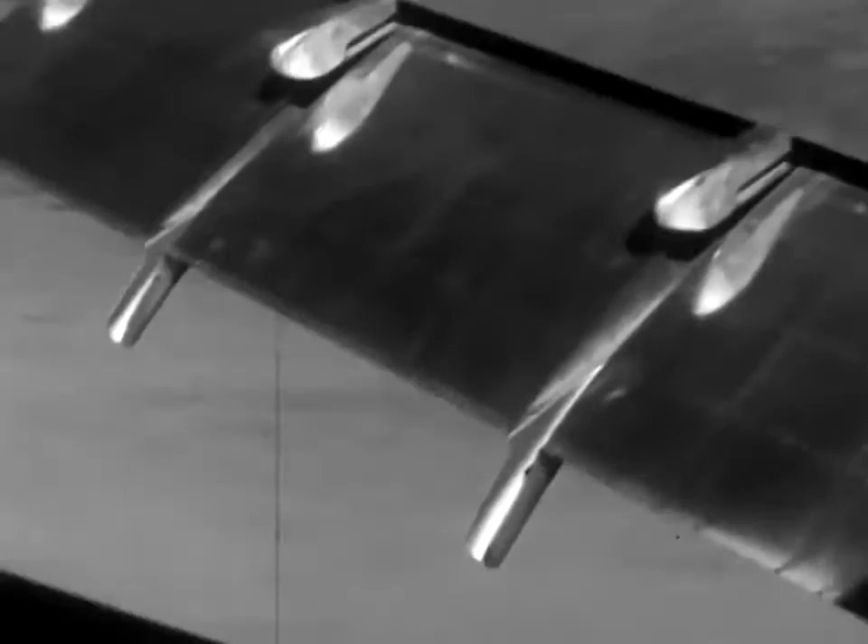As the plane approaches the field, it slows down for the landing. The Fowler flap has been adopted and developed by Lockheed. The flap gives a greater lift to the wing and provides a brake action to reduce the speed. The plane lands at 65 miles an hour, and from a height of 50 feet, it can come to a complete stop in less than 600 yards.

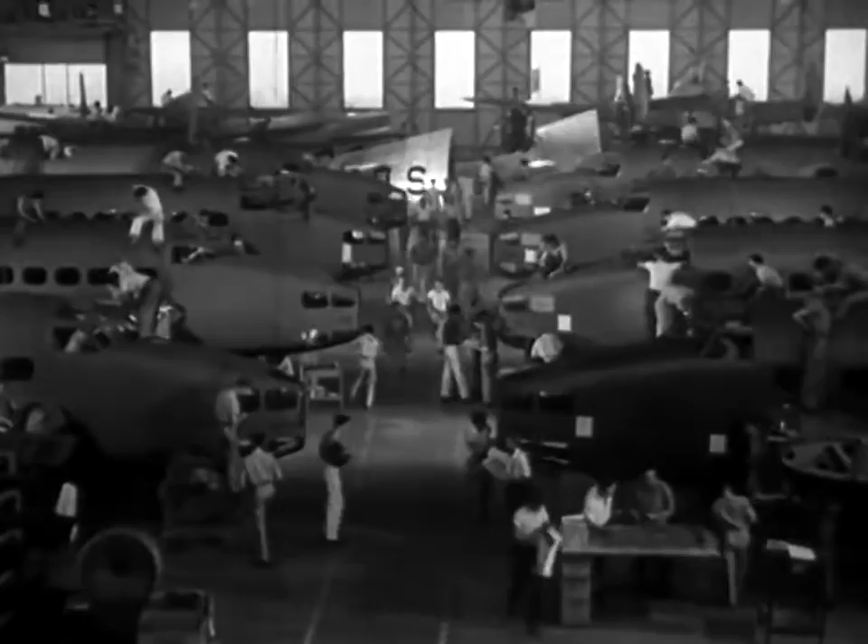This Lockheed Lodestar, with its safety, its comfort, and its great speed, typifies the ideals of aviation in America. To protect these ideals, Lockheed is contributing its share toward national defense and the defense of democracy in other parts of the world. These B-14 bombers, better known as the Lockheed Hudson bombers, are rolling off the production line at an ever-increasing rate. They have been ordered in great quantities by Great Britain and Australia.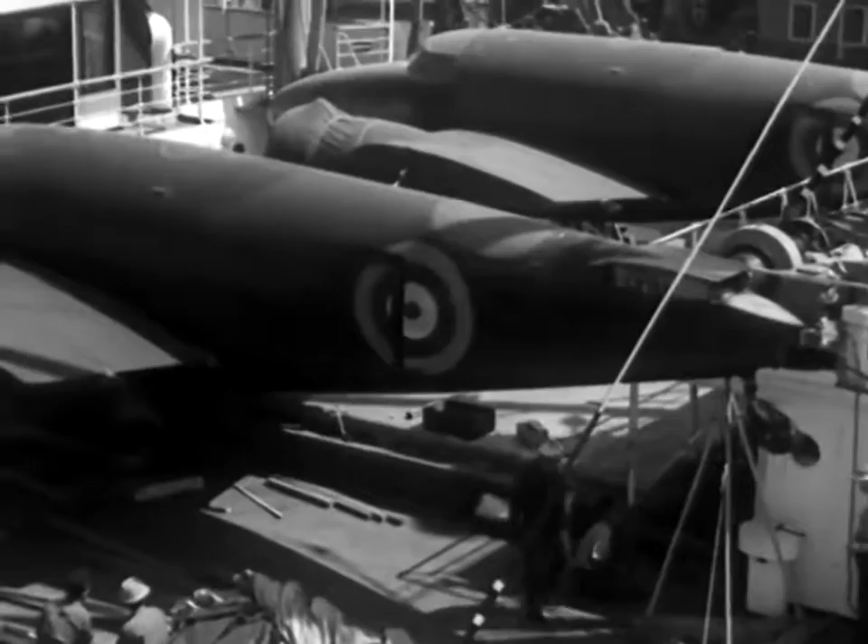When ready for delivery by boat, the Hudson bombers are dismantled. The sleek fuselages are carefully encased in canvas, and the wings, already stowed away below deck, are crated in wooden frames for safe shipment. When the planes reach their destination, they are easily reassembled and soon ready to take their places in the staunch defense of the British Empire.

And while these planes start on their long journey by water, others are being given their final test flights for the tough job ahead. Still more are winging their way directly toward Canada. In combat, in actual line of duty, the Hudson bombers have won a name for their efficiency and dependability.

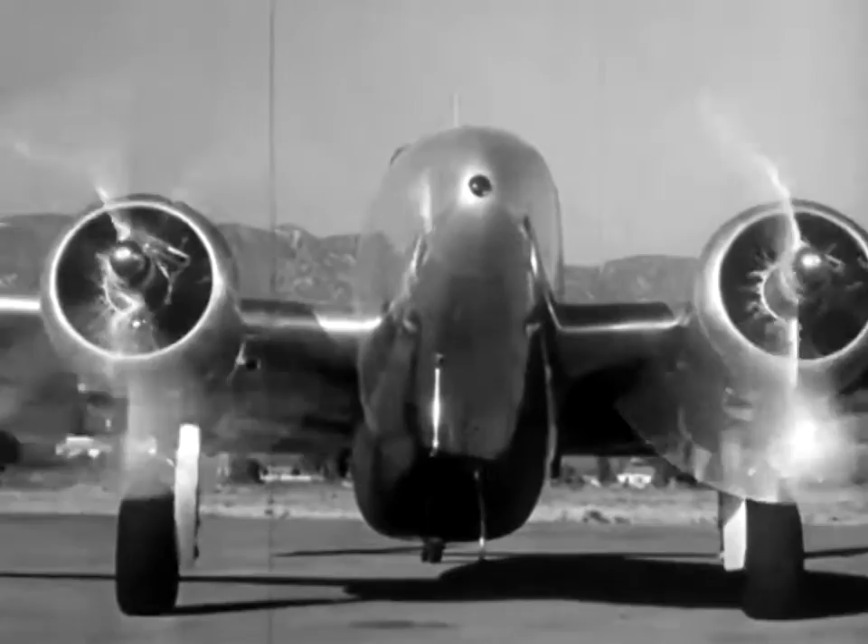As America builds its planes for commerce and for defense, it is well to remember that Americans invented the airplane and developed the modern conception of mass production used by Lockheed.

And out of the vast production line come Lockheed's, the 212, the Electra, the 12, the Hudson bomber, the Lodestar, and now Lockheed's answer to the challenge of our times, the Interceptor Pursuit P-38.

It has been developed solely for national defense, and Army officials consider it the fastest military plane in the world today. The P-38, a man-made comet.

The P-38 is a completely new development in conception and design. The purpose of this deadly single-seater fighter is to prevent any would-be attacker from reaching his objective.

Lockheed is building vast quantities for the United States Army, and many of its features are closely guarded military secrets. But it can be revealed that the P-38 will climb a mile in a minute, and its motors are so quiet that it can approach any target almost without warning.

As wings soar higher above America, so are soaring the hopes of free men the world over. For they know that whether it be for commerce or defense, ship for ship, American planes have no equal. Just as Lockheed commercial transports serve the people, so do the Lockheed military planes stand ready to serve should the need arise. The striking power of Hudson bombers, the speed of the P-38.